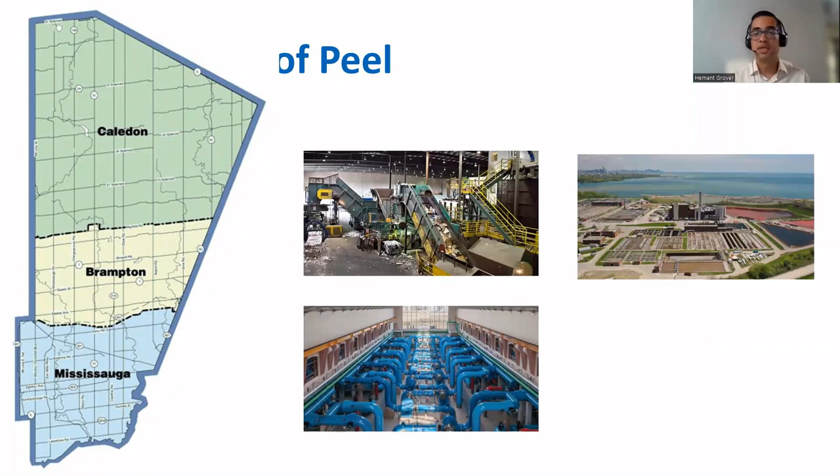Starting with a little bit about the region of Peel: Peel is home to approximately 1.5 million residents and 175,000 businesses, and is growing rapidly both in terms of GDP and population. To serve this population, the regional municipality of Peel has been around for roughly 50 years, providing various services from water, wastewater, and waste operations to paramedic, police, and affordable housing.

The leadership at the region of Peel keenly recognizes the threat that climate change poses to the residents of Peel and to our organization's ability to render municipal services to our community. To take action, Regional Council declared a climate emergency in October 2019, and at the same council meeting approved the region's first Climate Change Master Plan.

A little bit about the master plan. It is typical of most municipal climate change master plans in Ontario. It has a timeline of 2020 to 2030, with an interim GHG emission reduction target of 45% by 2030 against the 2010 baseline, and aims to be more prepared for extreme weather events, etc.

There are a number of actions and activities outlined in the plan. At the time the plan was developed, we estimated what the incremental capital cost would be over the next 10 years. These numbers have since increased, as costs have risen significantly, but we also estimated the overall cumulative operational cost savings over the life of this master plan. So with that overview of our climate change master plan, I'd like to zoom in on the region of Peel's affordable housing portfolio.

Starting with some of the numbers my team loves to see and share on a daily basis. This covers all our municipal services: water, wastewater, operations, long-term care. The yellow highlight is affordable housing, which has two sections: Peel Living, a 100% owned subsidiary of the region of Peel, and regional housing, which we own but is managed externally.

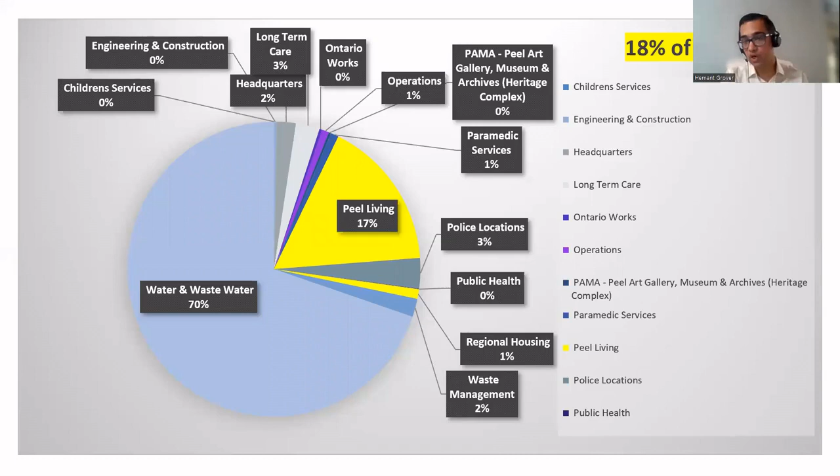All the affordable housing consumes roughly 18% of the total electricity draw that our organization consumes at a corporate level. Moving into natural gas, which is dirtier, both affordable housing streams account for roughly 52% of total natural gas use—that's more than all the others combined. So again, that is a significant emission source. But looking at overall greenhouse gas emissions, housing accounts for roughly 18% of total corporate emissions.

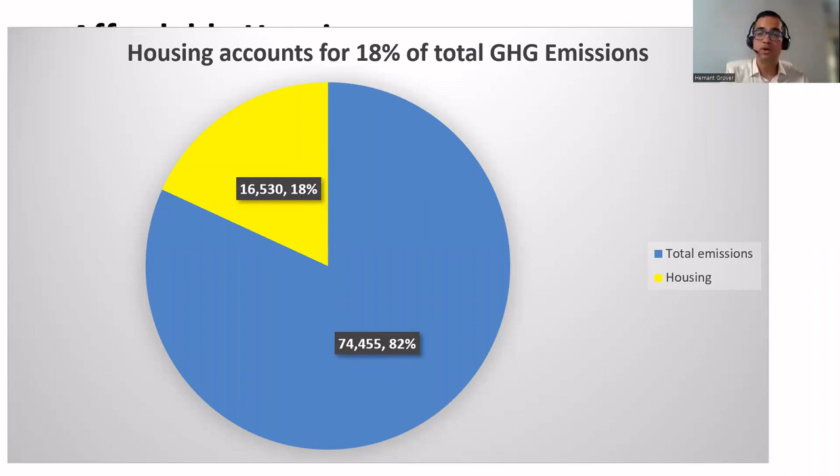But focusing on some of the climate change opportunities, actions, and results, I'm happy to share some of the good work we've done at the region of Peel. As I mentioned, housing accounts for roughly 18% of the total greenhouse gas emissions of the corporation.

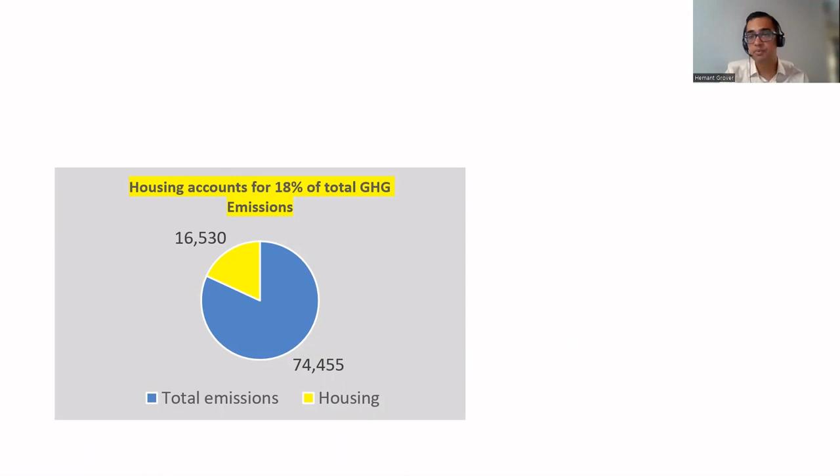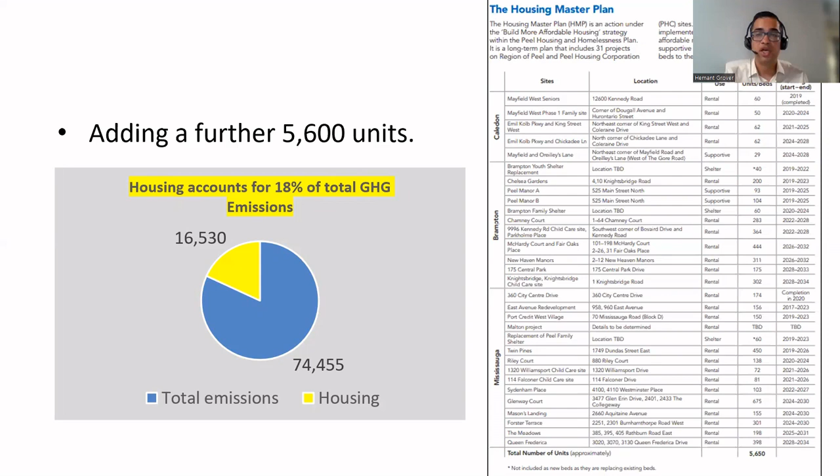But as I also mentioned, we're a growing municipality, expecting significant growth in population. To serve this population with affordable housing, we're adding a further 5,600 units of affordable housing over the next 10 to 15 years at the region of Peel. And we want to make sure that as we grow, we do not grow our existing GHG inventory. So the question is: how do we have net zero emissions coming from new construction?

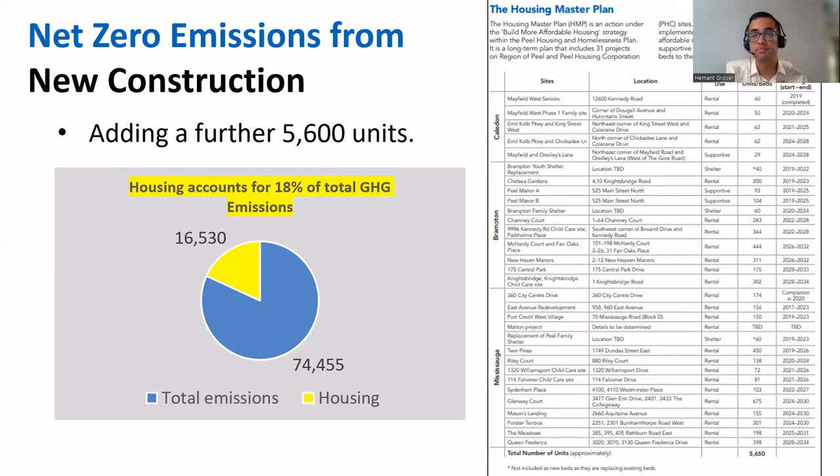To make that possible, the region of Peel and our office developed the region's first net zero emission standard and policy focusing on new construction. The policy sets out the background, position statement, guiding principles, and declares the organization's commitment to ensure that as we grow and build more, all our buildings will be net zero emission. The standard sets out the metric and performance requirements for which the architects and engineers are assigned—you shall build to the standard.

Zooming in a little more on the standard: the region of Peel's net zero emission standard for new construction has a technical requirement that all buildings adhere to the latest version of the Canada Green Building Council's zero carbon building standard. We had a thorough literature review of all the standards out there and were on the verge of developing our own standard, but to help the market and the fraternity understand, we adopted a national standard instead—though we went a little over and above what the Canada Green Building Council's standard allows for.

We've made it a standard that all new buildings will have zero combustion on site—so no natural gas combustion. In addition, we've asked for a thermal energy demand intensity, or TEDI target, that has to be met relevant to the zone we are in. We've also asked that the architects and engineers produce a climate change risk assessment. We provided a guideline for that, because we want to ensure it is a net zero emission building, but also one with the climate risk identified, so that actions can be taken to reduce the climate risk of these new buildings.

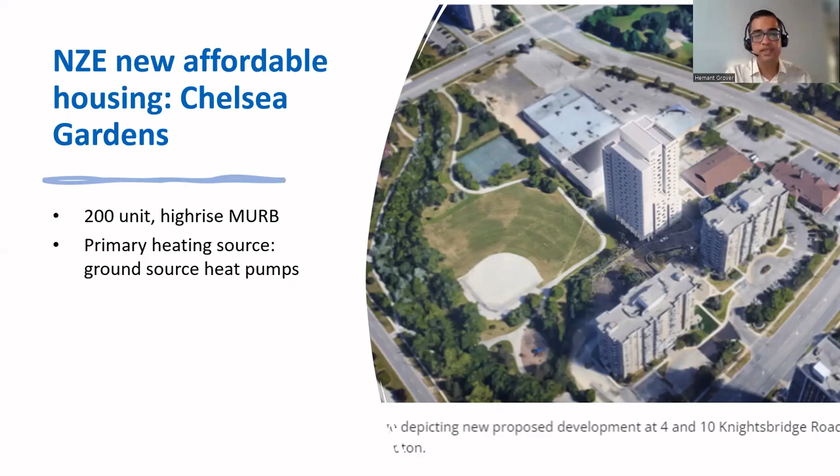So shifting gears to the energy and emissions management plan. Now we've covered all buildings that are going to be built, but how can we take existing housing buildings onto the low carbon pathway? Well, let's get a painting of the landscape.

We have roughly 95 housing buildings, 8,500 units of various archetypes and vintages, but all of these have various life spans. That means the mechanical equipment in some of these buildings is due for replacement now, some are in 2 to 5 years. The envelope shows a similar pattern, and we're trying to optimize the end of life of the buildings and their asset components to take them to a low carbon pathway.

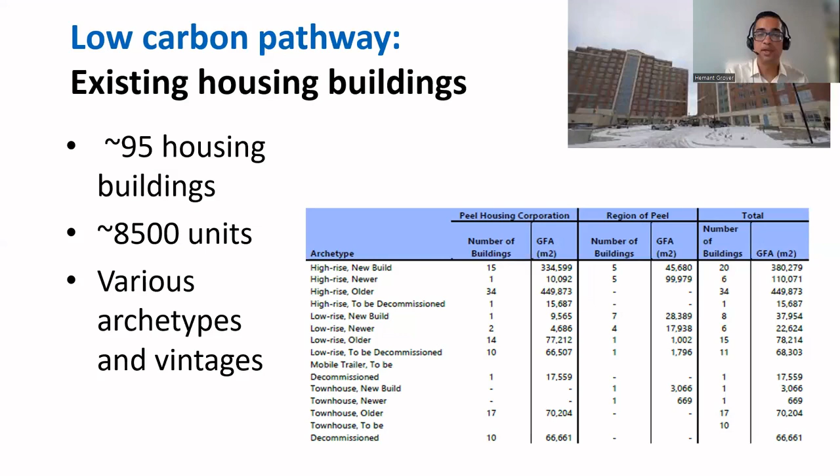To do that, we have completed the development of an energy and emissions housing management plan for the housing portfolio. Within the umbrella of the bigger climate change master plan, this is a focused energy emissions management plan for the housing sector, and it sets an interim GHG emission reduction target.

For affordable housing we have a corporate target, but we're setting targets for each of our portfolios. The energy emission management plan aligns with the 10-year capital plan, knowing when assets need to be replaced. Based on that, we identify projects and buildings where we determine the cost to take it to a low carbon pathway, the GHG emission reduction potential, and the low carbon technologies involved.

Depicting this graphically, on the y-axis you have GHG emissions, on the x-axis a timeline. The blue line on top is the business plan, so if we did nothing for all our affordable housing, this is where our emissions would be by 2050. But with an energy emissions management plan in place, we've identified 4 energy and emission reduction scenarios that get us to our low carbon pathway of net zero by 2050, with some carbon offsets.

Being a little optimistic, or rather balanced, we've given an interim GHG emission reduction target of 55% for affordable housing. That's a target that's been conveyed to affordable housing.

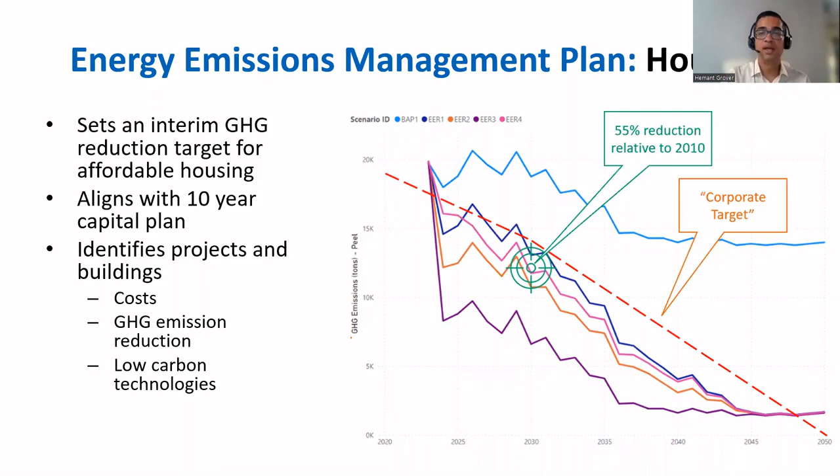Now we're making decisions with actual projects, identifying how to bundle projects within a building to maximize our GHG emission reduction, and how to bundle buildings together. We look at how to bring the best cost and GHG optimization while also considering tenant impact, not wanting too much disruption to our tenants, and looking at life cycle cost.

In the same color depiction, the blue is an actual real-life building we're looking at. That's if we did nothing, the business plan, versus scenarios where we bundle the roof and ventilation upgrade, window and wall upgrade, and heating upgrade, allowing emission reduction much quicker than 2050. Or if we do a whole building retrofit, how soon can we see the cost optimization and GHG emission reduction?

Life cycle cost helps us identify, if we were to pull forward a boiler replacement from 2041 to 2025, what the cost would be. It's the mix of all these parameters that helps us make the decision.

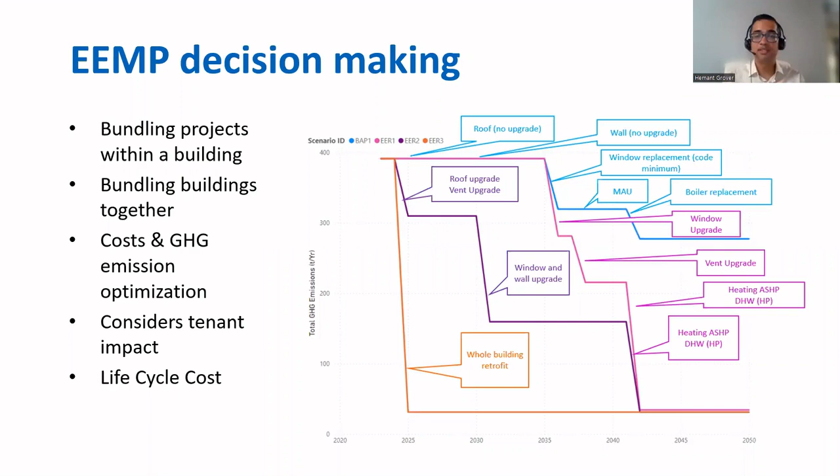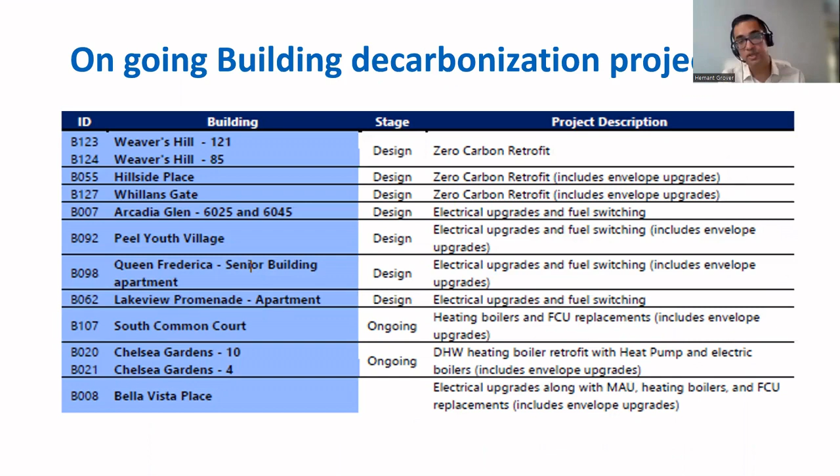I'm happy to share we have a number of buildings with shovels in the ground being built to net zero emission. I'll share the first, Weavers Hill, but there are a number of whole building retrofits, down to bundled retrofits of components together, and even some individual components.

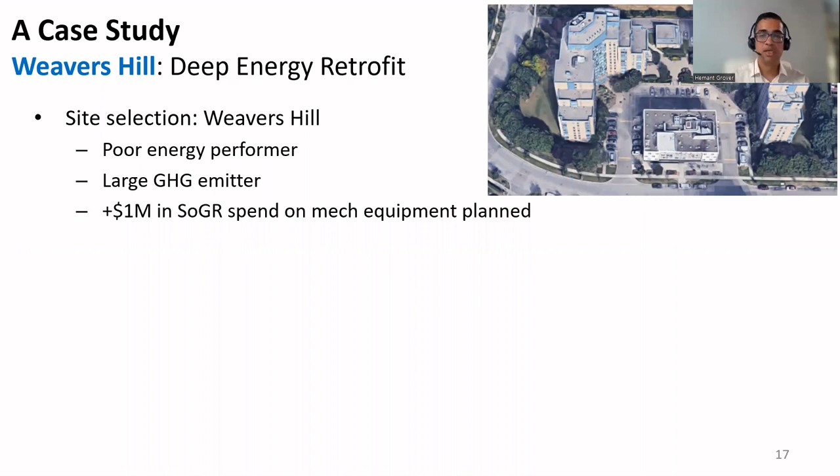Zooming in on Weavers Hill, which is a case study I wanted to present, we selected one of our largest buildings. The building footprint is on the top right corner of the slide, and it's one of the poorest energy performers in our building stock. By virtue of that, it's a large GHG emitter, but we also had $1 million in SOGR spending planned for mechanical equipment replacement.

So our office came in, did a feasibility study, and identified 2 options to take the building to a low carbon pathway. I'll go through this fairly quickly. Option 1 identified technologies for heat pump and fuel switching.

This brought about a 91% GHG emission reduction with no net operating expenditure impact. Option 2 had a much higher price tag. By the way, option 1 was 12 million.

Option 2 is roughly 3 times the price, but with a smaller GHG emission reduction, a smaller marginal increment from option 1, 91 versus 93%. But it had a complete building retrofit, envelope, wall, window repair and replacement with low carbon mechanical equipment. Our office was obviously requesting approval for option 2, but given that this is a pilot, our council approved option 1, which we're proceeding forward with, knowing in the future we can also upgrade the envelope.

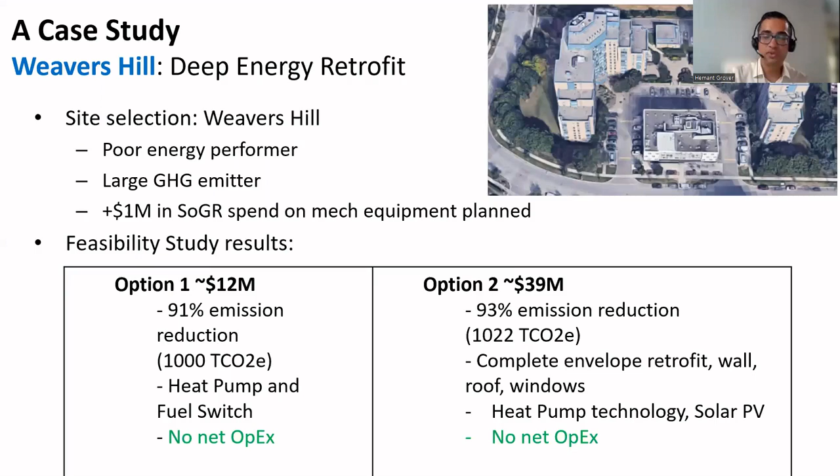So a significant GHG emission reduction. But again, the utility and operating cost, which is always any building operator's concern, was a marginal reduction. So it is in all respects a good business case.

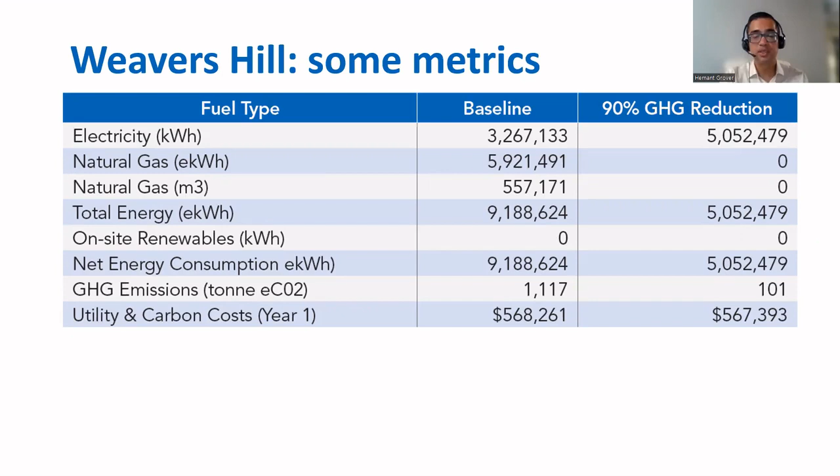I do also want to share that FCM is a key funding partner and stakeholder in this project. FCM has supported us with a $175,000 study grant for us to be able to study this feasibility and identify the low carbon options. But also the Region of Peel was successful in achieving the $10 million capital grant funding from FCM to support this project, which is a loan and grant mix that is dependent on the energy reduction by the project.

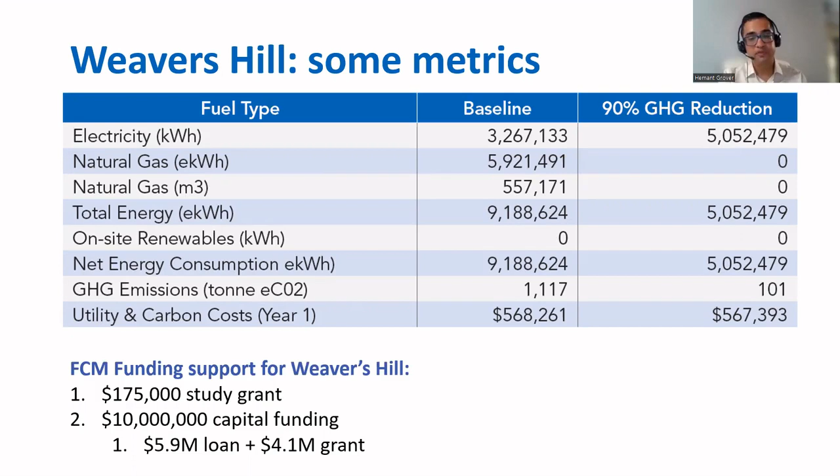So shifting gears again to the last section of my slides, I do want to touch on the net zero emission building retrofit standard.

This is a retrofit standard that we are developing, knowing that we will be retrofitting all our buildings, at least the 95 affordable housing buildings will be prioritized. Our approach to developing the net zero emission retrofit standard is pretty much similar to the new construction standard, which is a lot easier.

We will develop a standard, a procedure, and a policy that will support the standard. It will be aligned with the energy and emissions management plan. All the good work that the models, the consultants, and our engineering team has brought out, we will align with that and allow for a transition period to move over from a business as usual approach to a low carbon approach. I can share offline some of the challenges we have faced with our property owners and project management teams.

On the last slide, the net zero emission building retrofit considerations include a zero carbon goal by 2050. Most of the buildings that we retrofit by 2030 will also be in place by 2050, but we will look at the archetype, vintage, and condition. It would be a building level or a system level retrofit.

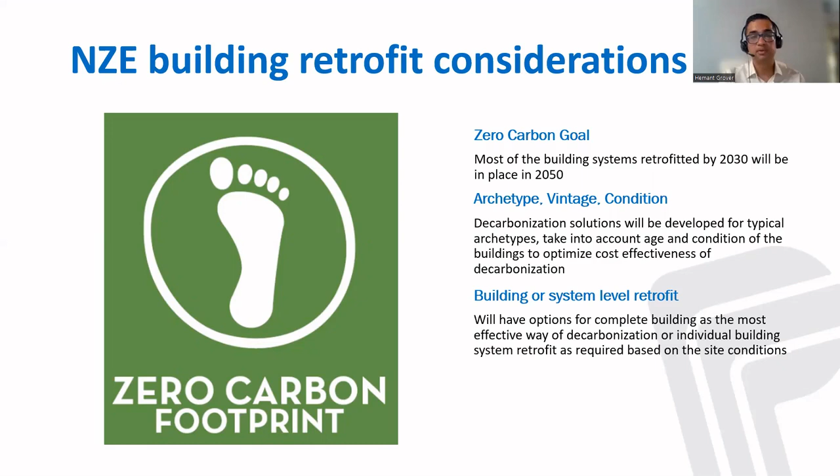Work has started literally this week on the net zero emission building standard, and I'm hoping by early next year I can share some of the good work that has come out of our building retrofit standard. And that's the last slide from my end. Thank you very much.

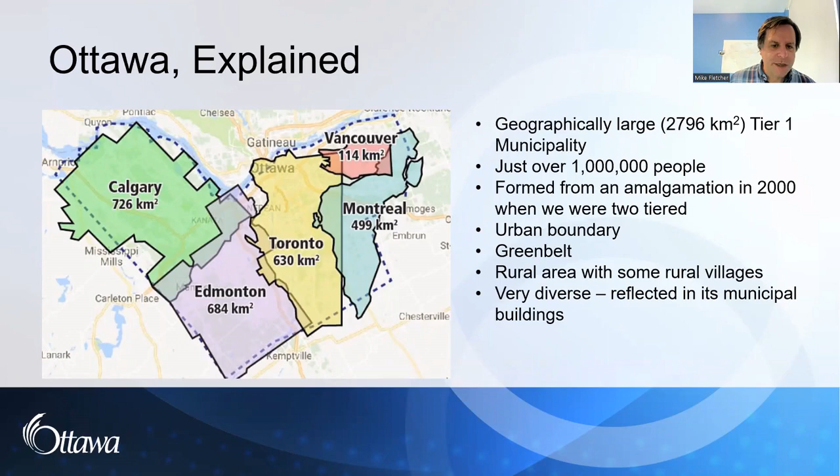This is just a little bit of a layout of where this retrofit fits in the big scheme of things. We have a climate change master plan that looks at mitigating emissions and climate resiliency. In that, we have something on net zero buildings compared to plans for transportation and community heating and other projects. Within the net zero buildings, we're looking at pilots to 5 or 6 existing buildings, and we're also looking to update our municipal green building standard for the corporation's buildings.

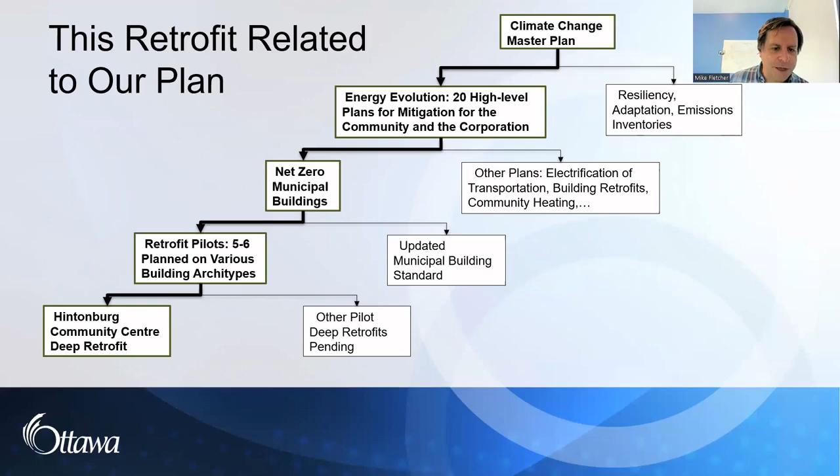Under those 5 to 6 retrofits, we have Hintonburg, our topic for today. Hintonburg is in the area west of downtown. It was built in '84. It has a few different amenities - a gym at the back, a community police station, daycare, some kitchens. It's heavily used, didn't even get much of a dip - well, got something of a dip during the pandemic, but it's back to being very, very busy.

It's known by staff doing the retrofit, and actually me in particular - I worked there doing kind of more standard energy conservation over the years before I joined the climate team. So I know the building fairly well, and that's a nice advantage.

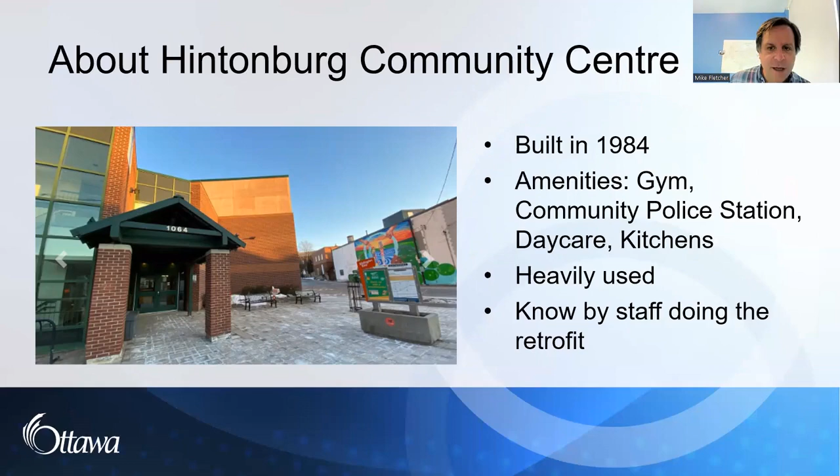Deep retrofits for us, according to our climate model, require a 60 to 70% drop in thermal energy demand for heating, depending on the building, and that's kind of an average score.

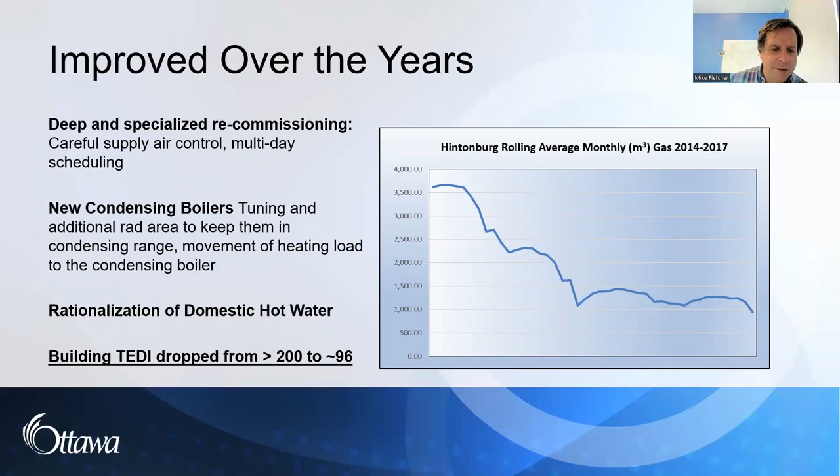Over the years, at this building, we've done quite a bit of work, and you can see the graph is just how gas consumption has dropped. There's also been a nice drop in electricity, and we've done a lot of measures. So we're starting off with a building that's performing reasonably well, and we know it, which for a first deep retrofit is an advantage as opposed to walking into a building that hasn't seen a lot of work recently.

The other things that helped us - we have very good utility trends for all our buildings, so this one included. We did some site inspections, and we built a concept report. So that's kind of what we had leading into this.

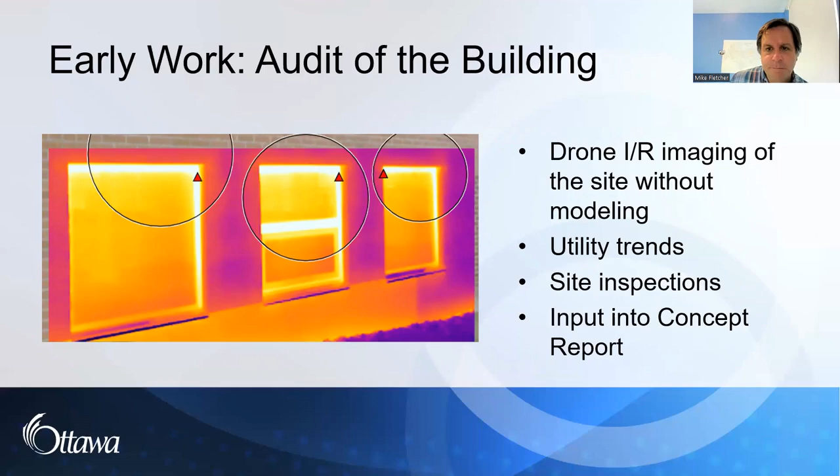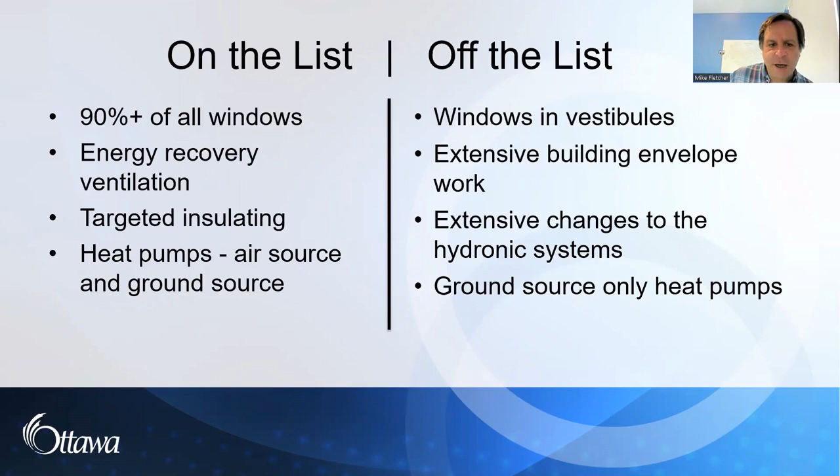We didn't do extensive changes to hydronic systems because that gets quite expensive. And we went from planning to have the entire building done by ground source heat pumps to a mix of ground and air source. That was a decision kind of made on the fly as we started analyzing costs.

A big measure we've gotten into is windows. We've become a fan of windows with multi-PET layers between two panes of glass. We're putting in R11 versions in Hintonburg - R11, quite high. If you get them thick enough, they can go above R18. But the original windows, if you do a back-of-the-envelope calculation on heat loss, or go into more detail, you'll find a good chunk of heat leaving the building through normal two-pane windows.

So we decided that was something we could tackle. I think the last bullet here is important. When you're going to hydronic heat pumps, you can have a real challenge trying to heat the building with the existing hydronic system. Often hydronic rads are associated with windows. If you can make the windows have an R value getting close to walls, you can avoid having to do a lot of upgrades on the hydronic system. So in a way, the window measure works to avoid another prospective expense in existing buildings, and that's a key learning we've had.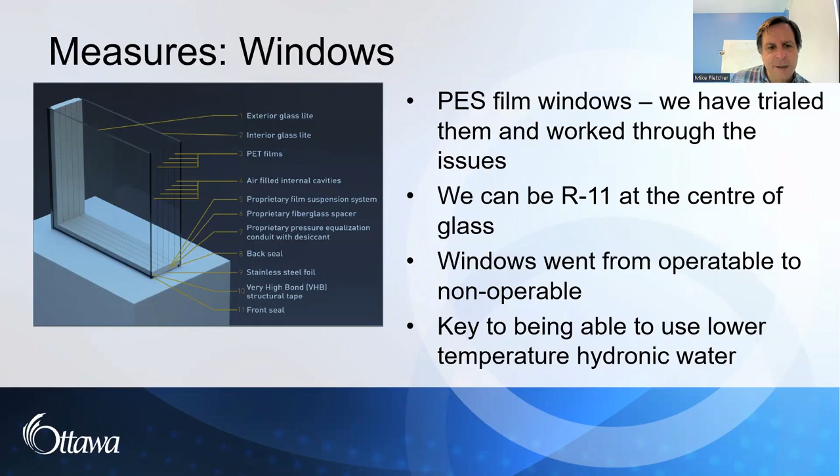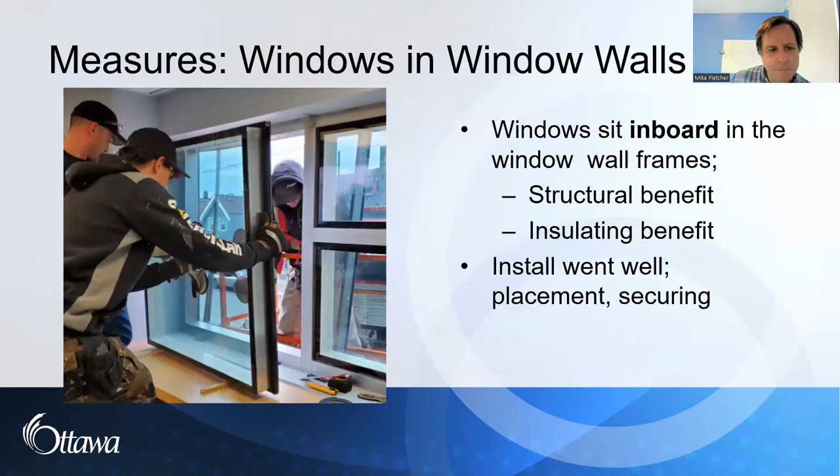We've also done some work on how to put windows into curtain walls - I could spend half a day on that topic alone. We've worked with an architect and done some testing, because windows are important and there's a lot of heat loss there. So we're really sweating this detail.

So much so that when it came time to look at the curtain walls and the window install, we did infrared imaging in more detail. We pressurized and sub-pressurized a room, overpressurized it, and tried different treatments on the frames, because our high-level scan showed the frames were a big source of heat loss, even though they're supposed to be thermally broken - maybe not so much. We tried a few different treatments, worked with the architects on them, and found some things we will use on the main curtain wall in the building.

This was just a small test - a bit of a long story, but this is just 4 windows in a room. We have one curtain wall that goes up 2.5 stories and is 4 meters wide, so it's a big curtain wall. We'll apply what we learned in this small area to the big curtain wall when we work on it this September.

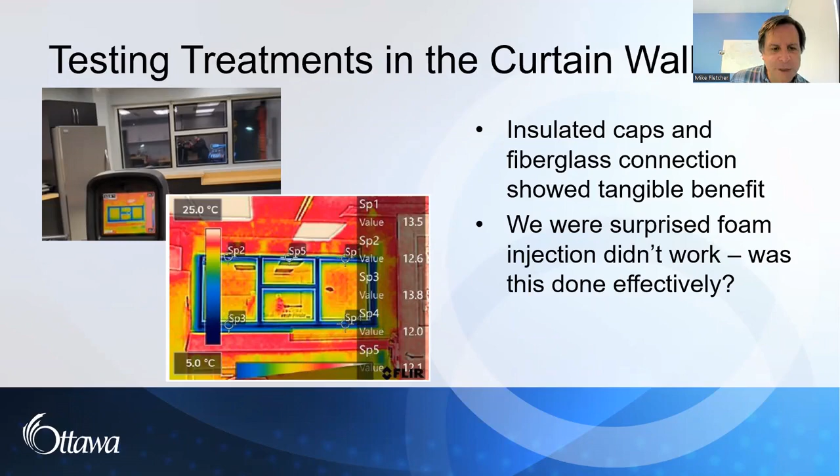I was encouraged by FCM to be a little forward looking in the last slides and think about what we're learning and what we should do. A technical issue would be gravity rads in buildings - we have a lot of them, and often they work by having fairly hot heating water. If we're switching off gas onto things like heat pumps, high temperature heating water can present a challenge for the heat pumps. So we really need to do something about gravity rads.

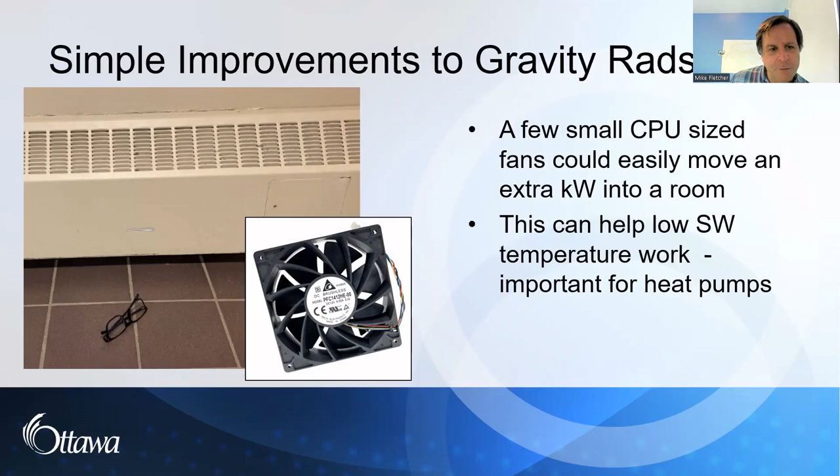Rules and lessons: especially if you're piloting and everybody's trying to get used to doing a deep retrofit, start with a building in good shape. I couldn't have imagined trying to write the concept report if I was just reading 6-year-old condition assessments of the building and trying to decide what to do. I knew this building was in good shape, and that made things immeasurably easier so far.

Have a good building automation system. The trending I was able to do over the winter on the building automation system has informed the sizing of the heat pump, so much so that I could say within a couple percent what the size of the heat pump has to be. That's been very valuable.

Work can be done in stages with course corrections along the way. In doing this retrofit, we're not taking the building out of commission for months and months. So how can we do it? Well, we can do the windows, which we did - we did them last fall.

And then we can trend how the building performs on the coldest day of the winter, decide what the building's new windows really did for us, and then design from there. So recognize that you can do things like that.

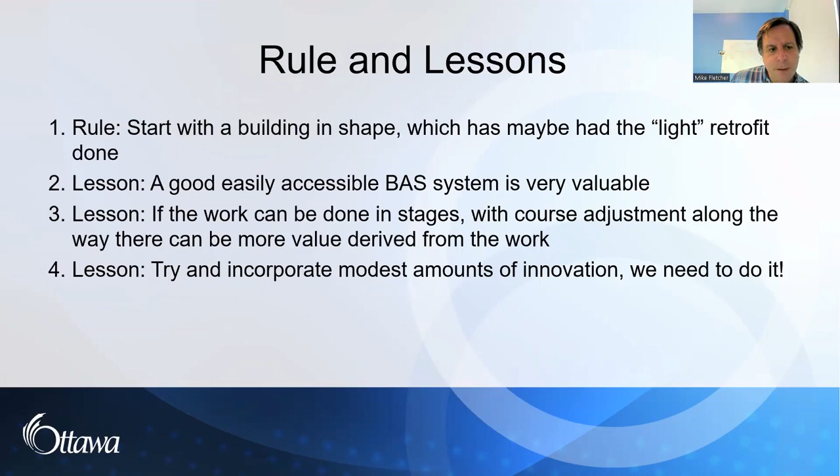And just some ideas - just to control costs, try and integrate everything with life cycle work. I mentioned we didn't do the envelope. The roof for this building will be on a life cycle schedule, and when we come back and it's time to do the roof, we'll improve the thermal performance of the roof.

The second item - I think many practitioners in this area are under some pressure to have good returns from their work. That's hard when you're trying to eliminate all the combustion-based heating. I think we can get some modest return on money spent, but it's not the greatest.

Maybe it's important to also think of deep retrofitting as a way to fight a form of pollution, the greatest one we face right now. So it's a bit - we make a building better, perhaps knock down the annual cost of running it a bit. But we should also view that it's about fighting pollution, not really trying to get rich off it necessarily, and really consider the wider benefits, like I'm saying.

So utility system costs - where we're reducing the total amount of energy, our local utility, our distribution companies will not have as much of a struggle reinforcing or increasing the size of utility systems, and that's got to help. We maybe don't see that directly when we do a return on investment, but it's there. It helps the community. We're keeping a building in a state of good repair, and we're also going to improve climate resiliency. And just a few thoughts on policy and programs.

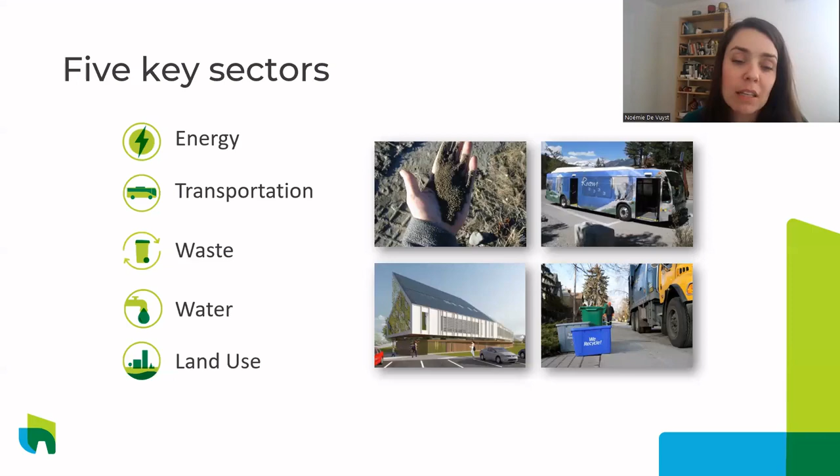In terms of who this funding is available to, any Canadian municipal government can apply, in any province, whether or not you're a member of the Federation of Canadian Municipalities. We can also give funding to partners of municipalities, be it a private sector entity, a municipally owned corporation, or a nonprofit. If you're applying in partnership with a municipality, that can be one way to receive funding for a project, depending on the specifics of the work and who's incurring the costs and things like that.

This is a bit more detail on the different types of projects we can fund in each of those 5 sectors. Under energy, we can fund new construction of buildings, any municipally owned facility, where the target is to apply or aim to achieve net zero energy performance. We can also fund retrofits of existing facilities aiming to reduce fuel use and GHG emissions. And thinking of community energy, which I know Mike mentioned, that's something the Green Municipal Fund has funding for—we can fund energy recovery or district energy projects.

Community energy in particular will continue to be a big focus of our funding, even when it changes in 2024. So even if you're thinking of future projects and aren't sure applying before the end of this year is feasible, district energy, but also the building sector, will all continue to be big areas of focus.

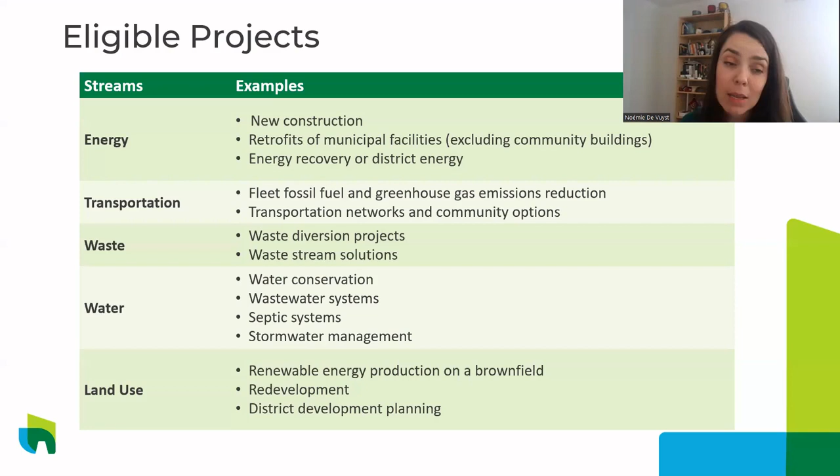So definitely worth reaching out and keeping the Green Municipal Fund in mind if you have projects like that you may be working on. Very quickly, transport, waste, water, and land use, again, we'll continue to fund projects in those sectors. One thing that will be changing is that we will have more of a focus on greenhouse gas emissions across all of our sectors.

In terms of dollar amounts, for our core offer, what we're able to fund right now is projects at a few different stages, so the funding is built to support you depending on wherever you may be. If you're a bit earlier on, we can provide funding for feasibility studies, things like designs, data collection, assessing what your baseline performance is, for example, in terms of energy consumption. For a feasibility study, we can provide a grant of up to $175,000, and it's matching funding, so we can provide up to half of costs.

For pilot projects, we can provide a grant of up to $500,000. This is for when you've done a study already, and maybe you're looking to test something at a small scale on a more temporary basis. And then finally, we do have funding for full construction. Our capital project funding can cover up to 80% of project costs to a maximum financing of $10 million. The majority of this is a loan, but it does come with a supporting grant, worth 15% of the loan. So for some easy numbers, if you got a $1 million loan, that would mean a $150,000 grant.

In terms of interest rates, we really aim to be competitive, and that grant portion really helps offset that interest rate even further.

Beyond those 5 sectors that I shared, these are 3 new funding programs or streams that were created in 2019. These 3, by the way, won't be changing in 2024. They'll stay the same in terms of the specific criteria. So anything you see on our website or speak with us about today, that'll stay the same.

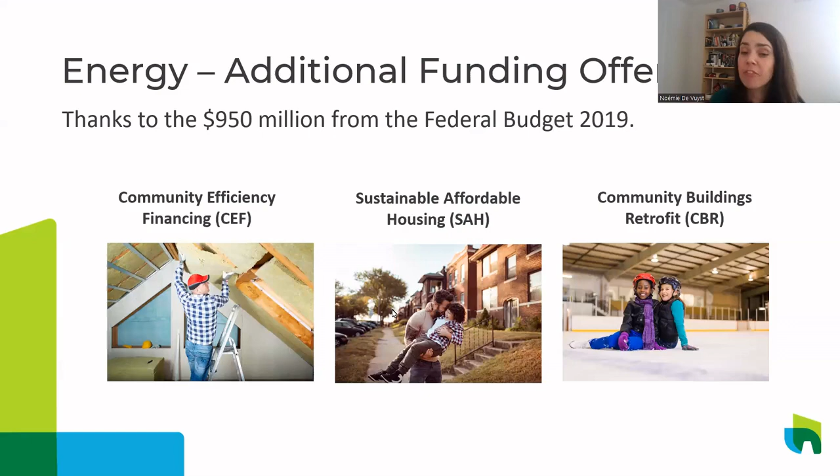I was thinking a little bit about this when Mike was speaking, that this funding really helps support studies where you're planning over the course of maybe up to 10 or 20 years, when is the best time to do retrofits to be most cost effective. And this is one where we can fund those studies, but also the capital projects.